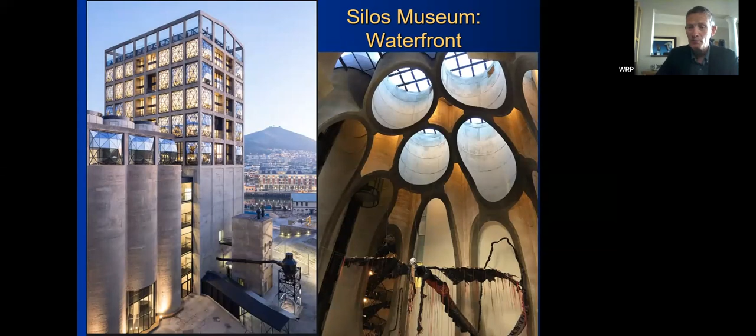Coming back to South Africa, you know what you're missing. Some of you have been here before. It's got lovely coastlines, and Cape Town in particular is a very nice part of the world, one of my favorite spots. Some lovely scenery here, this is Camps Bay, right next door to the conference centre. You've got big shopping centres you would have been able to visit. There's also a new museum right next to the conference centre called the Silos Museum. As you can see, it's an old silo built hundreds of years ago that's been converted into a large, impressive museum and hotel complex.

Inside, they've cut the silos out, and they've put in lots of exhibits, etc., that you would be able to visit. This museum is apparently one of the top 10 in the world. It's been rated for its architecture, etc.

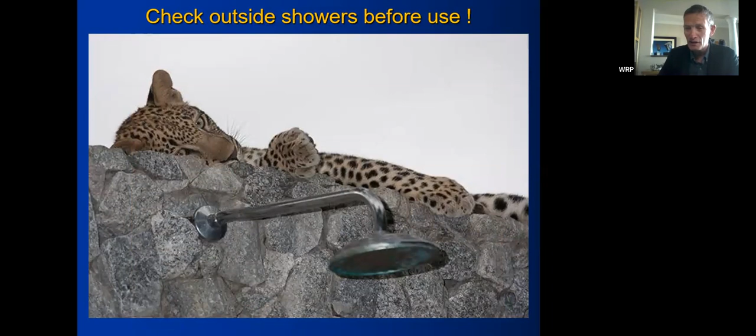Outdoor showers are quite common in most of the game parks, so you just have to be careful. If you have a shower, just watch before you go into the shower who's there. Elephants - always close your windows. Don't tease the elephants, they don't like being teased too much, so you've got to be a bit careful with the elephants. Some of the game parks, you can hire bicycles.

They even have races through the game park. For mountain bikers, most people do their personal bests in these conditions, so you should do quite well. Just make sure you can cycle at more than 25 miles per hour, which is the top speed of the elephant. You won't be able to outrun any of the other big 5, like the lions and the buffalo and such like - they go at between 40 and 50 miles per hour. So just make sure you can go faster than your partner, then you should be safe, I would think.

The South African water supply system, I mentioned it previously - I'll recap a couple of slides. So those that were in Seattle may recognize one or two, but the talk is quite different. South Africa's got one of the most integrated and complicated water resource systems of its type in the world. We are transferring water from one part of the country to the other, often over distances of 1,000 kilometers or more, and through mountains, over mountains, round mountains, you name it.

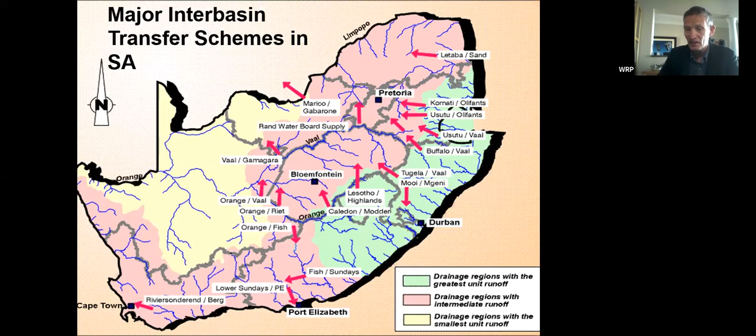This is going to happen more and more all over the world as water becomes scarce. It's already scarce - I showed this picture previously. This is the Orange River Basin, which is 1 million square kilometers. This is probably the most integrated water resource system of its type in the world.

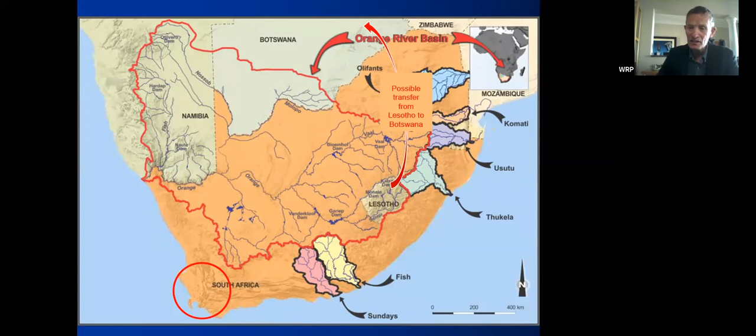We're currently looking at a new transfer from Lesotho as far up as Botswana. Botswana is looking at the potential for transferring water from the Lesotho Highlands, a mountainous region with excess water, up to Botswana, which is pretty arid, quite flat, and has got water issues. It may or may not happen - it's currently being looked at and investigated.

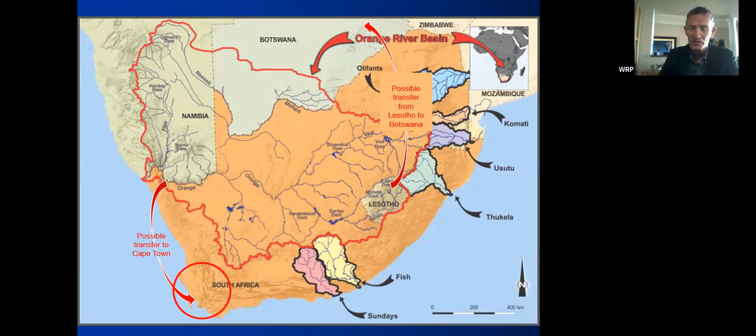The other one that people keep considering, especially after the recent Cape Town problems, is moving water from the Orange River down to Cape Town. That's about a 600 to 800 kilometer transfer that would be pooled into this huge integrated water resource system. I mentioned water resource systems in the past - just to touch on it, I'm not going to go into any level of detail.

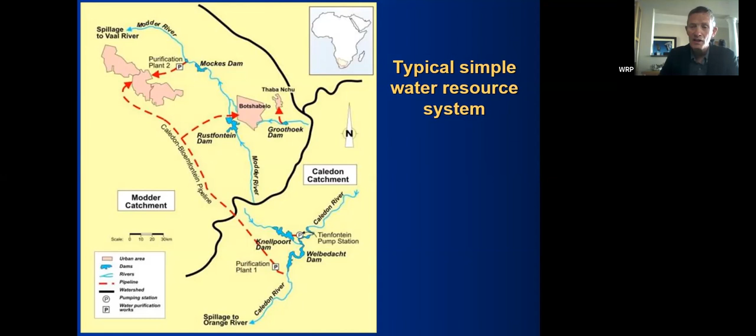Basically, we take a map of an area, which is fairly simple. We identify the resources, the dams, the channels, etc., and we identify the demand centers. We then develop a systems model, which is basically kind of complicated. We make it really complicated, adding linear programming, dynamic programming, out-of-kilter algorithms, and anything that makes it even more complicated. Then we analyze it, running it through 1,000 plausible sequences of weather patterns, and we get lots of potential results.

We use these models to operate very complicated and integrated water resource systems, supplying different demand centers at different levels of reliability. That is a key element of a major water resource planning analysis. Not every demand center gets supplied at the same level of assurance.

Farmers, for instance, would be supplied at a 1 in 20 year risk of failure. A city would be supplied perhaps a 1 in 100 year risk of failure. A power station at perhaps a 1 in 200 year risk of failure. We don't go above 1 in 200 years - it becomes a bit academic after that.

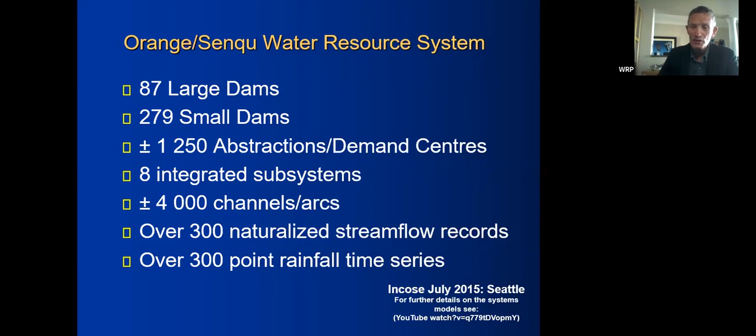That system is made up of 87 major dams, almost 300 smaller dams, 1,250 demand centers or abstraction points, 4,000 connections like bits of river, canals, pumps, that type of thing, and 300 naturalized inflows. Again, I'm not going to go into the detail of this - it's all documented somewhere on the internet, so you can find out more if you're so inclined.

What's important, and we've mentioned this a couple of times, is that the larger the system, as you develop very large systems, like a 1,000,000 square kilometer system, it increases the critical periods, and you end up with a 15-year critical period instead of a 3 or 4-year critical period. Natural droughts in South Africa tend to occur every 10 to 15 years, naturally.

This slide here is a bar chart showing the storage in the reservoirs for the whole country of South Africa. The top of the bar represents the total volume, and the blue part of the bar represents how full the dams were at that specific time. Where you see a lot of yellow, that represents storage that is not full - it's not got water in it, representing a drought event within this 100-year record.

Over the 100 years, you can see there's about 6 or 7 drought events, and these are naturally occurring events. It's often very easy to blame climate change on everything, but you need to bear in mind that droughts do occur naturally, and climate change may increase the frequency of the droughts, or it may make them worse than they would otherwise have been. But with or without climate change, you will still get droughts and you will still get floods.

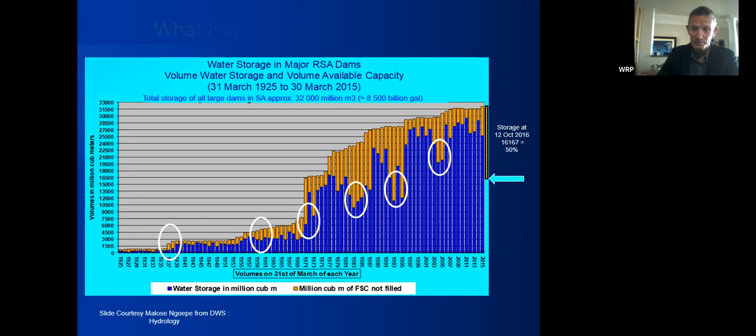Now, Cape Town - what happened in Cape Town? You've probably seen it on the news since 2015. There was quite a lot happening in Cape Town; it was a daily thing on the news.

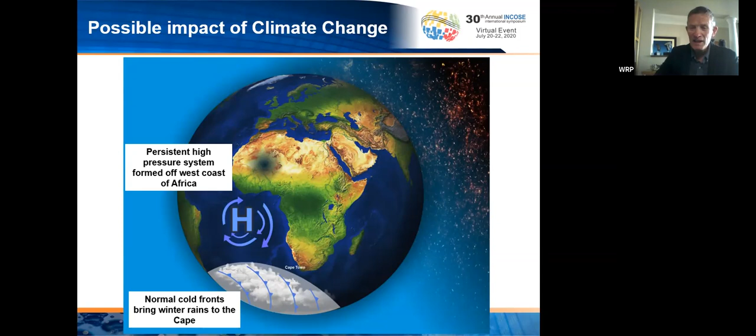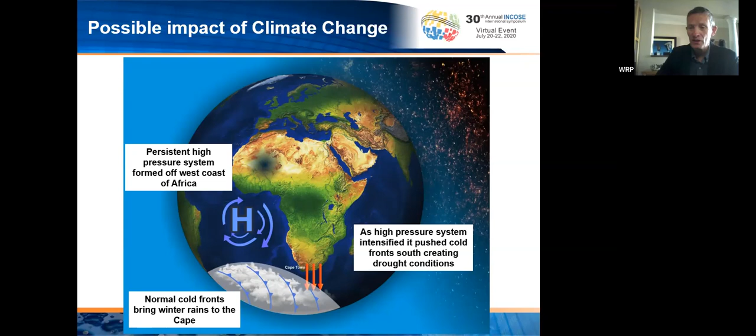Cape Town, being at the bottom of the African continent, tends to receive winter rainfall due to cold weather fronts coming through - it's a climate system model that they've got. So the cold weather brings rain to the Cape. What happened over a period of 3 or 4 years was that we had some high pressure systems that would come in and sit in the ocean just to the west of Africa. These are normal events, but we seem to have had more than the normal amount over that 4-year period, with the result that it pushed the cold fronts to the south and they missed the Cape. So Cape Town ended up having a 4-year drought, which was the worst in living memory.

Now, Cape Town is a city of about 4 million people. It's an urban industrial area - 70% of the demand is urban industrial and about 30% is agricultural.

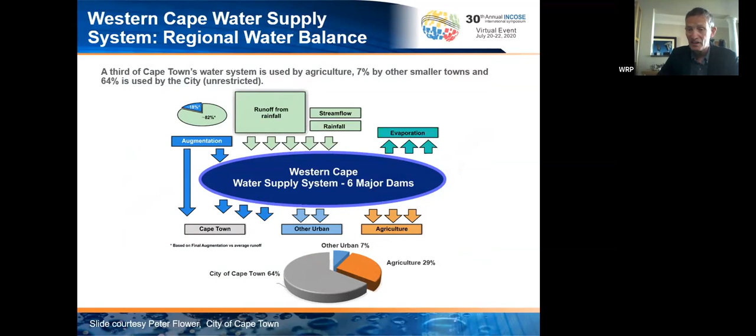It has 6 major reservoirs. I think in the previous presentation I talked about the Orange River system. We use the same techniques and modeling to analyze the Cape Town system, and there are engineers in Cape Town that are doing that. I'm not involved personally in it, but I do work with the city of Cape Town on occasion.

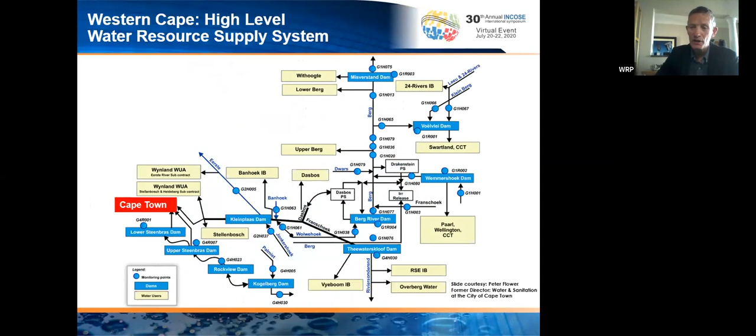This is just a schematic, a high-level schematic, showing you the water supply system. Again, it is horrendously complicated if you drill down into the lower layers, as we did in the previous Orange River system. A couple of pictures of the dams. You can see a few of the dams here in Cape Town. They've got 6 major dams that supply the city that are all linked together, and they operate the system.

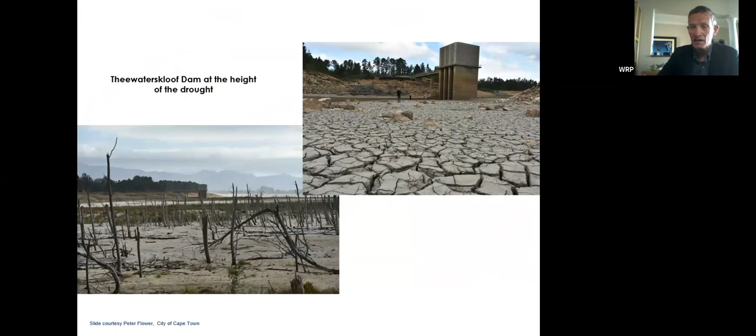This is what it looked like in their Day Zero, when they were running out of water, and Cape Town was reputedly going to be the first major city in the world to completely run out of water. That was false and fake news, but it was Sky News and a few of the other big news channels ran it every day, which didn't do the tourist industry a lot of good.

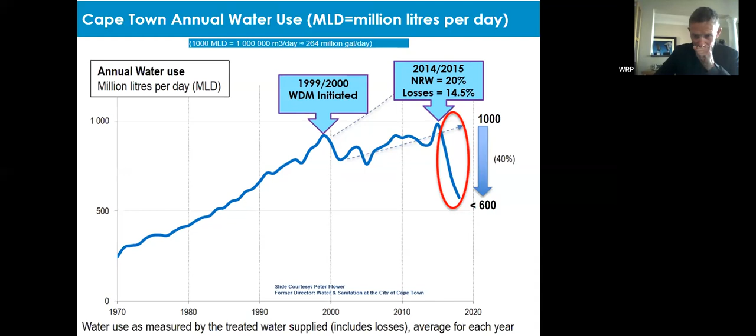So that's the demand management. Their losses were about 14.5%, which happened to be about the lowest in South Africa. Most of the cities in South Africa have water losses between 30 and 40%. So 14.5 was a very good number.

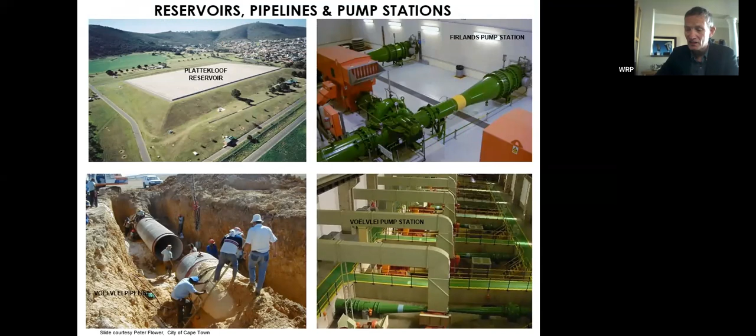A couple of pictures showing you the infrastructure in Cape Town, some of their pipelines, pump stations, etc. Water treatment works, they've got 5 or 6 big water treatment works.

Now, what was quite interesting, we organised a water loss conference in Cape Town for the International Water Association back in 2018. And we managed to time it such that we were within a month of Cape Town running out of water completely in the worst drought that they've had in 500 years. Whether that was a good thing or a bad thing, I'm not really sure, but it turned out to be quite interesting.

We got lots of hate email from all over the world, people sending me threatening letters about hosting a conference in a city that's got no water and how dare I do that and such like. And other people were less aggressive, but they wanted to help. People from Alaska and New Zealand wanted to ship water to Cape Town. It was very kind of them. I mean, they were being nice, they were trying to help.

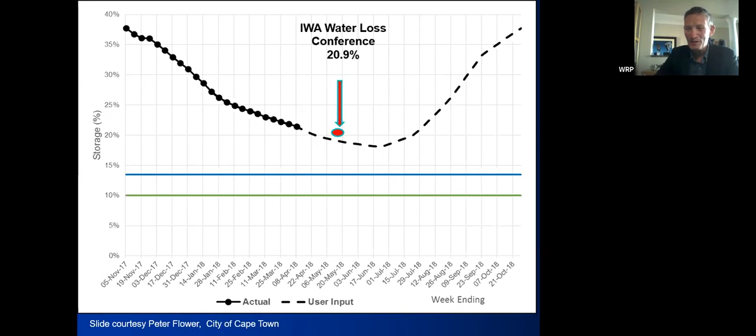Interesting, you can't really get much further away from Cape Town than Alaska and New Zealand. So when my colleague Peter Flower got these invitations to have water sent to them from those countries, he was quite taken by that. Cape Town, in fact, despite all the negative publicity about how bad things were and how they didn't manage this water loss thing properly,

they won quite a number of awards for their water demand management expertise and what they did in Cape Town. And they won the COP21 C40 Cities Award in Paris, which is quite a prestigious event. Not as prestigious as the IWA Award, which we gave them for being the first city in the world to reduce its demand by around 50% without going on to intermittent supply.

It's very easy to cut your water demand down if you just chop it down and cut areas off. But to do it without going on to intermittent supply, that takes a lot of expertise, and they deserved all the awards that they got.

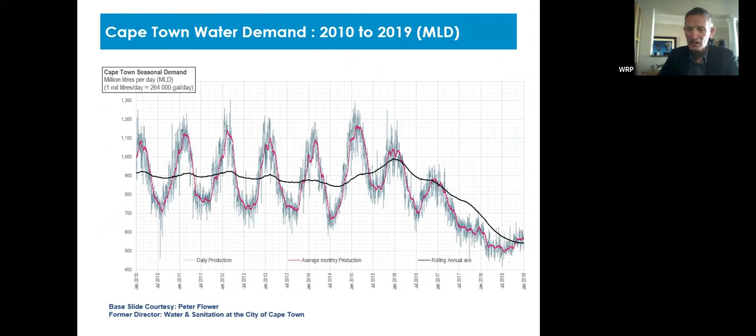This is a slide showing you the 10 years of demand, where the city of Cape Town, their demand drops. And you can see at the end, the last 3 years, it dropped down dramatically. I just want to point out, and you can go on the internet and check out if I'm telling you the truth here or not. In 2015, I made a quote in Seattle, and this was before the drought in Cape Town started. I said we were overdue the next drought and that it's on its way.

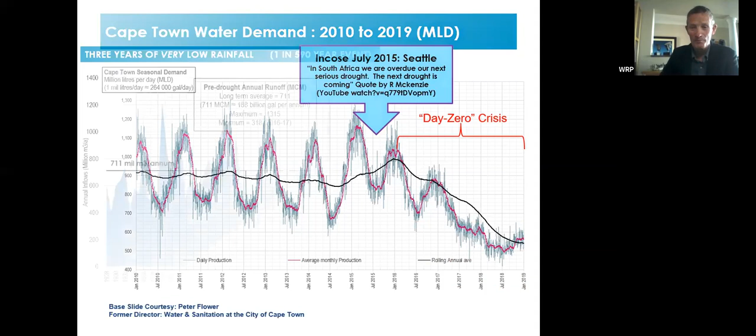Well, it came the following year, and it was a 1 in 500 year drought, believe it or not. So it was quite significant. This slide shows the annual inflow to the 6 dams in Cape Town, spread back over 100 years. You can see the last 3 years were well below average, and getting the 3 worst years back to back was something no one could have anticipated.

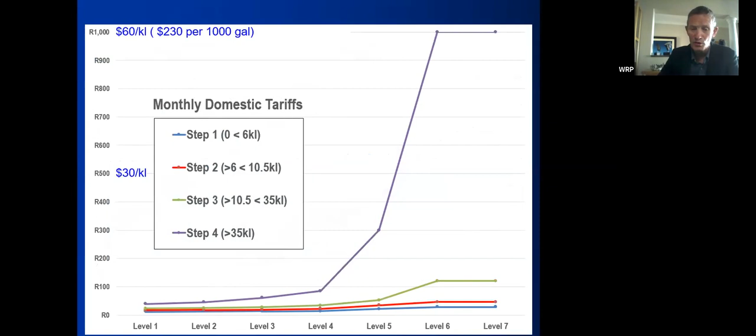They managed it by increasing the price of water, pushing it up to $60 a kiloliter for the top tariff if you use more than 35 kiloliters a month. They then got the penguins in to help people save water: shower for 2 minutes, report leaks, do water-wise gardening, shower with a buddy, shower in a bucket. They all did their bit, and the penguins helped save Cape Town, which managed to get through the worst drought in the last 500 years.

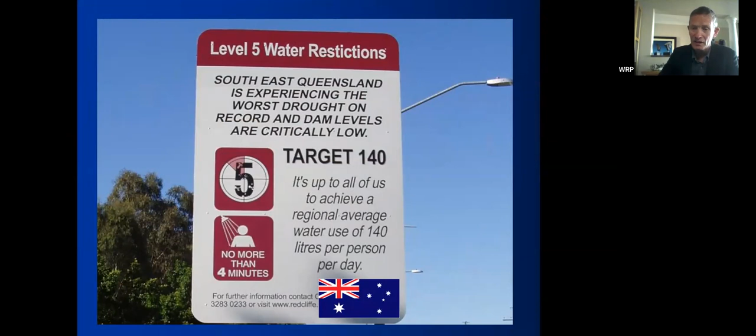Interestingly, compared to the Australian drought, the worst in Australia in hundreds of years, which had a target of 140 litres per head per day, Cape Town got down to 120. That's quite significant, so Cape Town was amongst the best in the world when it came to saving water.

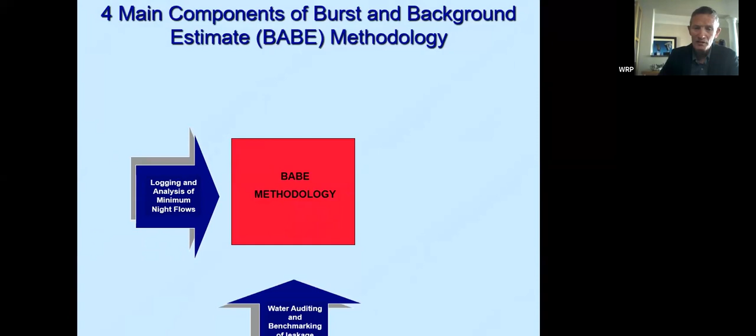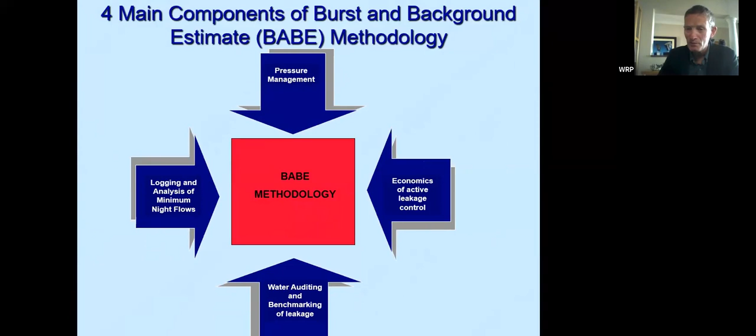In South Africa, now that we've talked about water resources and the systems, we look more at the leakage side. We introduced what they call the BABE methodology, burst and background estimate methodology, made up of 4 components. I'm going to skip through them fairly quickly, they're all available on the internet, and the software that goes with them is available freely from the Water Research Commission.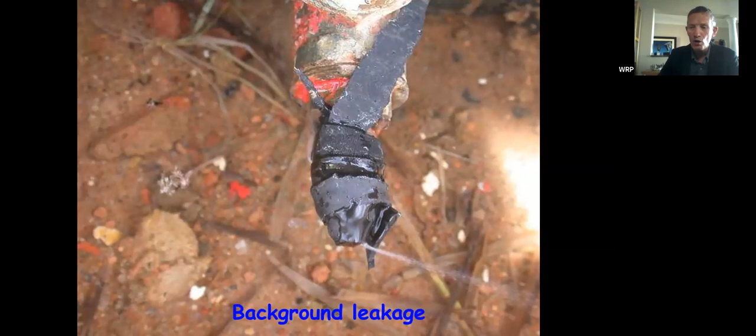It's based on the UK water industry approach of dealing with leakage in 2 forms: background leakage, which is all the small leaks you can't do anything about, and burst leakage, which is all the big leaks. So it's big leaks and small leaks, it's not rocket science. We've got 4 models.

This is a slide that I normally use, and I get into trouble using it quite a lot. So I've added Stuart Hamilton there from the IWA Water Loss Group, he's the new chairman, and I've passed this over to Stuart. He insisted that the slide wasn't representative, so we've modified it.

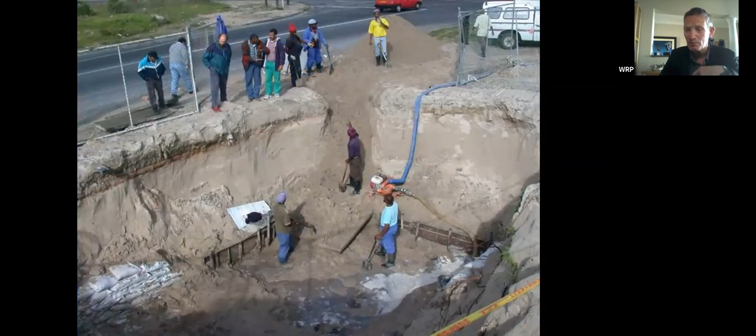We've got 4 models: Sanflow, Bench Leak, Presmac, and Econoleak, and these models are available on the internet. Bench Leak is basically a water auditing model where you use a water balance, a standardized water balance that has been accepted around the world, including America, Australia, Europe, Africa, all over the place. That's quite important - we talked of leakage performance indicators previously, and that's part of the water auditing and benchmarking.

I introduced an indicator last time, the ratio of spectators to workers, which is actually quite a useful indicator in South Africa, I have to say. But we've got a new one - I'd like to introduce you to a new one from a friend of mine, Prof. Mike Muller. He's actually an engineer with a sort of political hat as well, and he came up with this indicator called the Mike Muller Mercedes Index.

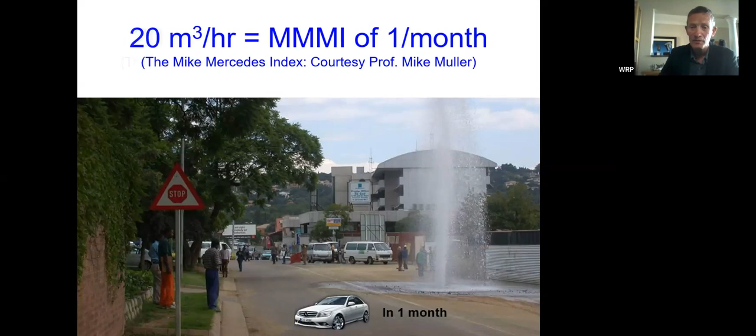It shows you that a leak is the equivalent of 1 Mercedes-Benz per month. It obviously depends on the cost of the water and the cost of the Mercedes - we're using a mid-range C-class in this case. And that leak is equivalent to 12 Mercedes-Benzes per annum. This is quite useful for the politicians, because trying to get over the value of leakage to them is sometimes a problem, but not if you tell them how many Mercedes-Benz cars it's worth.

So this is from a good friend of mine, Prof. Muller, and this is his index. I've borrowed a couple of slides there.

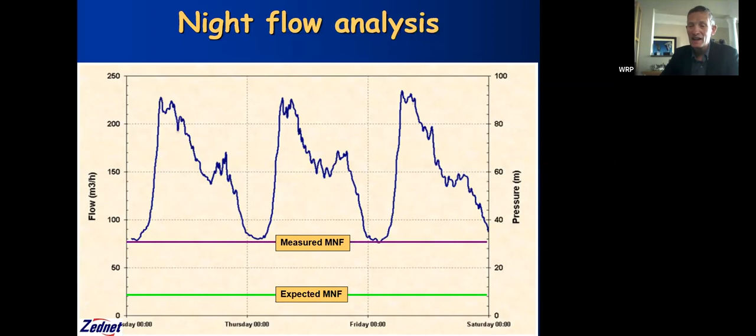There's another model, the second model, the night flow analysis model, which looks at the water going into an area at night time. You use this to tell you whether you've got a leakage problem or not. So you monitor the water, you measure the minimum night flow, then make an estimate of what it should be, and the difference gives you an indication of how much leakage you've got.

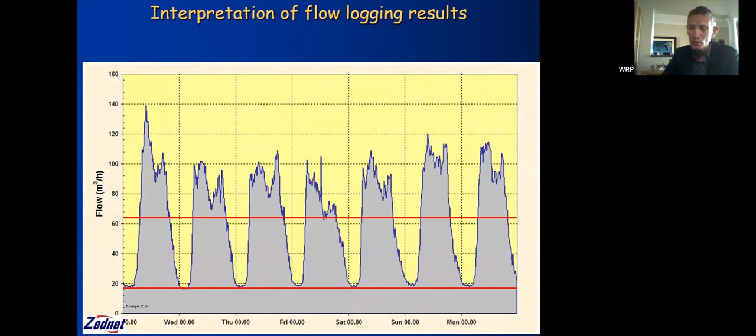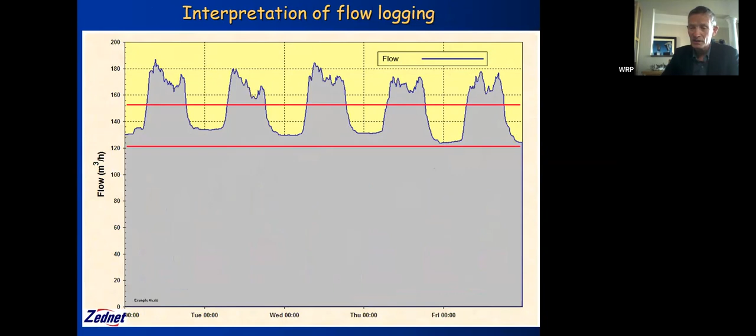It's quite useful. This is a logging result for a 6 or 7 day period - you can see it's not too bad, the night flow is not too high. And this is another example - these are real examples of real areas that we're supplying water to. This one has about 90% leakage, and this is not unusual, particularly in developing countries. The third model is a pressure management model.

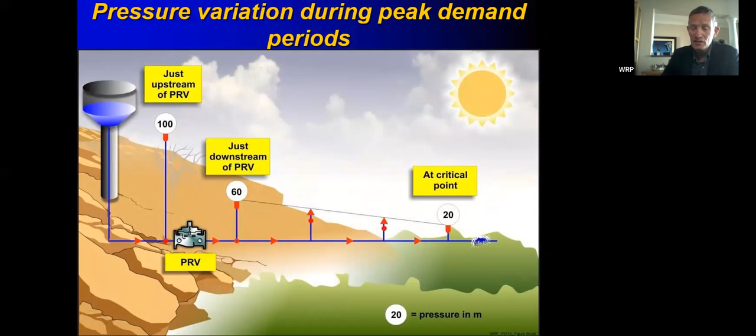Pressure management is your low-hanging fruit, something we promote very heavily in South Africa, and something I have a particular interest in. It basically involves looking at the system. Systems are designed to give you a certain pressure during the critical peak demand period at your critical point. During off-peak periods, the pressure builds up and you end up with leakage, particularly at night time. That's why most leaks develop at night, because your pressure builds up in the system.

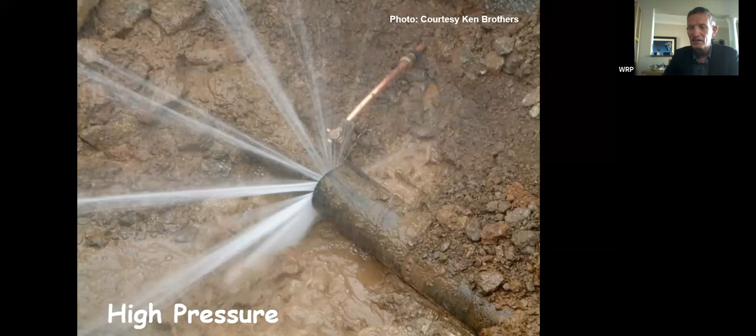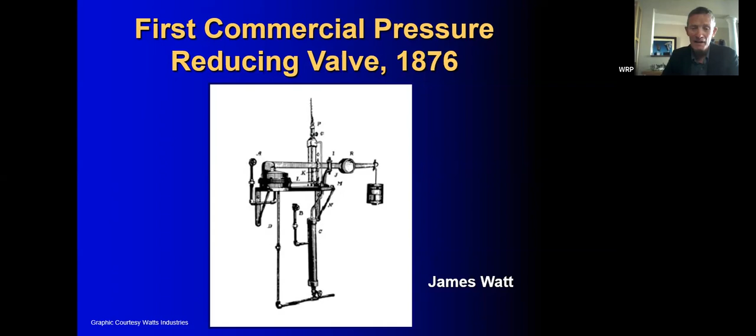So we introduced pressure reducing valves. I need to mention they were invented by a Scotsman, James Watt, who also helped kickstart the Industrial Revolution, so it must be good equipment. They don't quite look like that anymore, they look more like this. You get some big PRVs, made all over the world - good quality ones from America, Canada, Israel, Europe, Australia. Scottish, of course, will be amongst the best, I would imagine.

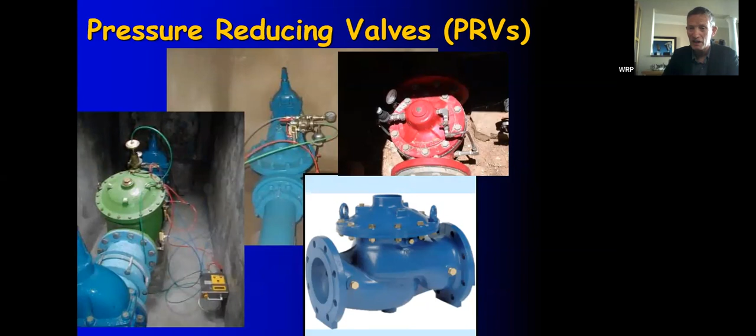They come in all sizes and colors, but we can also apply controllers to them that will give us extra control during the off-peak periods.

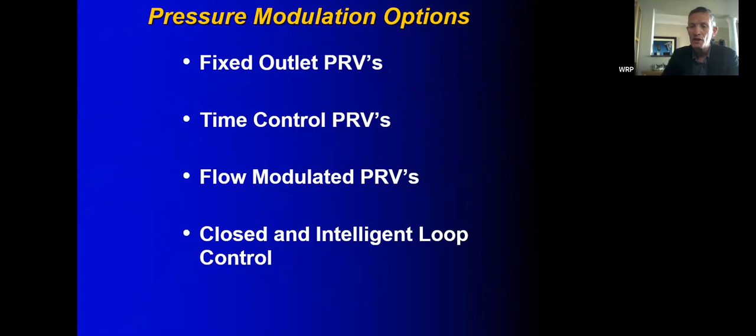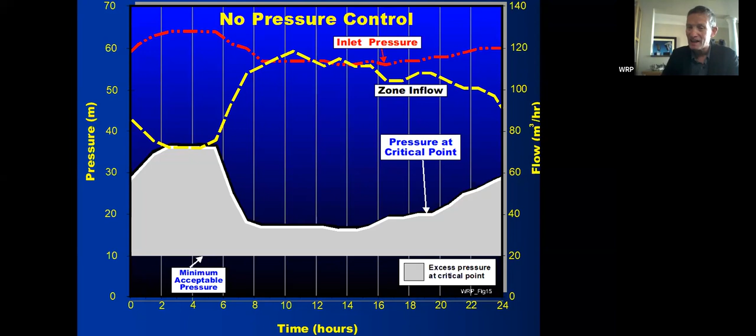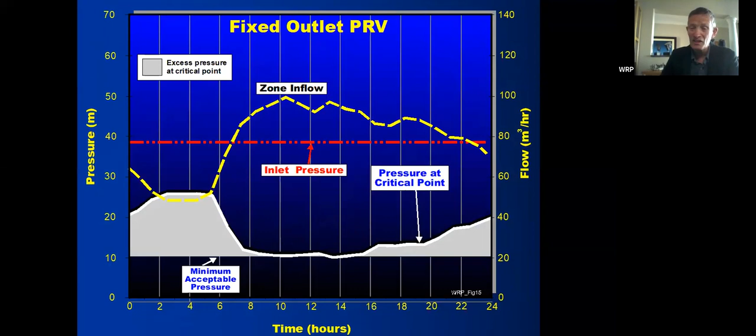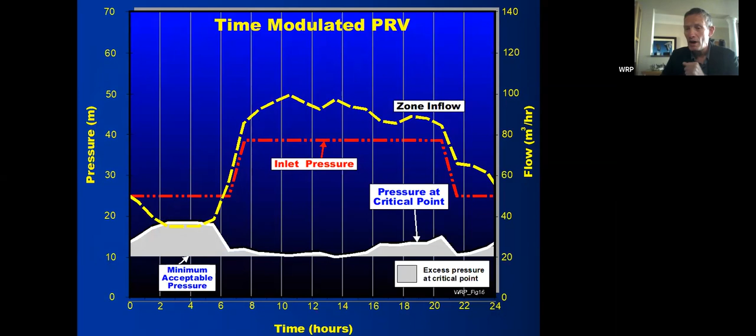This slide basically shows you a 24-hour profile at the critical point. The grey area shaded in is excess pressure at the critical point, indicating that you can cut down on leakage if you reduce that grey area. So we can put in a pressure reducing valve, and that will take something off the grey area - you can see just using a normal pressure reducing valve gives you your biggest saving to some extent. But we can then add an electronic controller that will take the pressure down at off-peak periods, night time and maybe sometimes during the day. That takes even more of the grey area out of the picture, so you've now saved additional pressure. Whatever you can save on the pressure reduces the leakage.

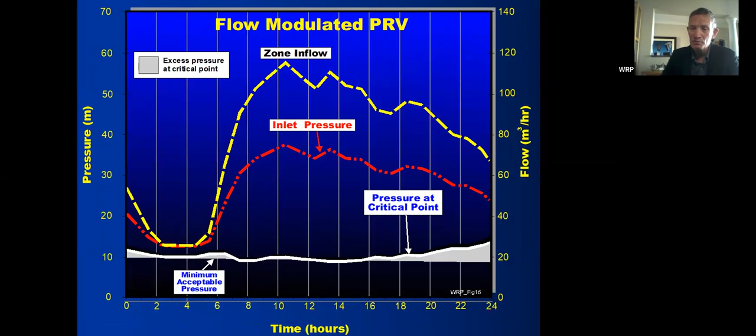And we can go to a higher flow modulating controller - that gives you probably the best that you're going to get. Or you can use closed loop control, or intelligent loop control. There's a whole bunch of new controllers that have come out.

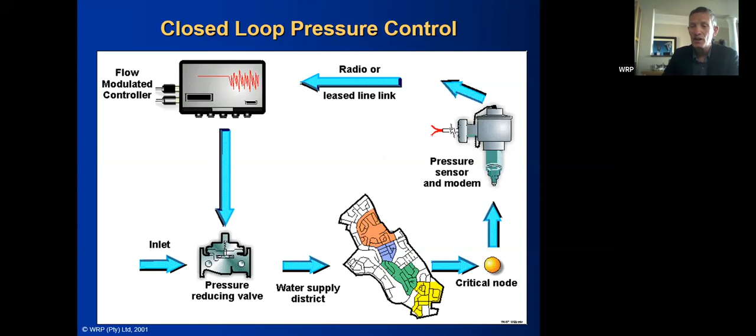Everyone has advantages, and for every advantage there's a disadvantage. Maintenance is often a big issue, as is the reliability of the components. Sometimes you're better just using a standard pressure reducing valve with no controller; other times you should use the most expensive, fanciest controller. There's a couple of valves there using hydraulic control - they're also quite popular these days.

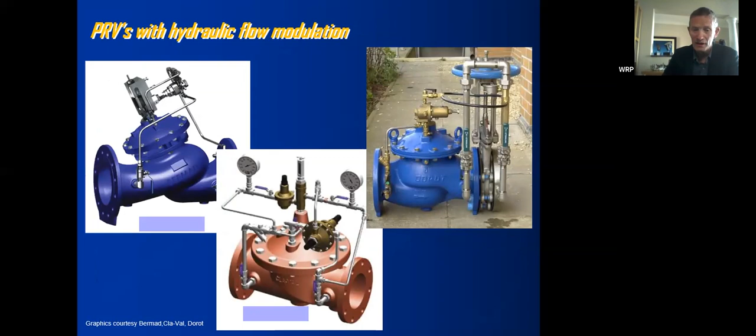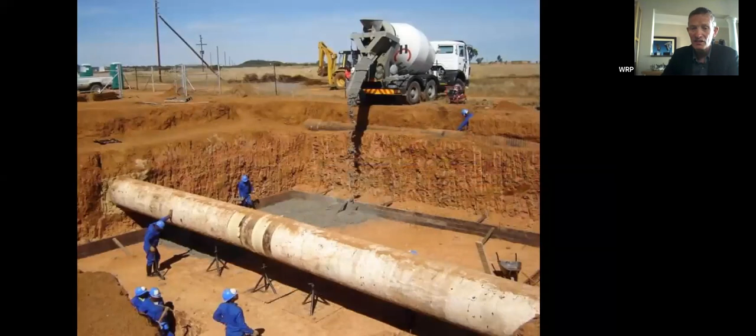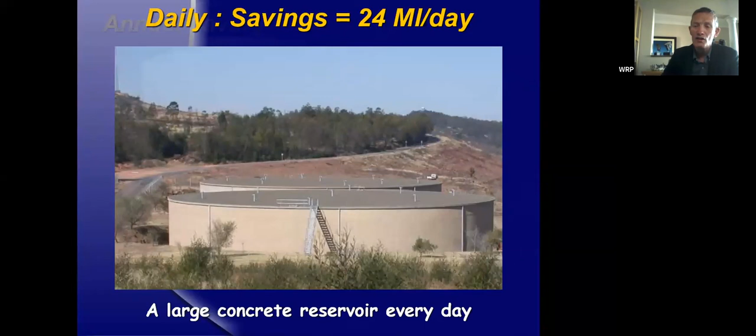Some of the big installations around the world we've worked on - Khayelitsha is a big installation, we saved about 9 million cubes per annum, that's a swimming pool every 2 hours. Sebokeng is another big installation, in Johannesburg, similar idea, similar savings. Both of these installations had a payback of about 6 weeks on the cost of the actual installation. It's difficult to say exactly how much the savings were because exchange rates keep changing, but the numbers were big - they're certainly big.

The fourth model available through the Water Research Commission is the EconoLeak model. I don't really like this one, it's a bit complicated, but I'll take you through a couple of things.

We look at how much water you lose in a leak, and the key take-home point is don't look at the size of the leak, because that's not always telling you how much water you lose. This leak lost 20 cubes in 3 hours. This leak lost 40 cubes an hour for 6 hours, so 240 in total. This is a huge leak - it lost 600 cubic meters of water. Then we've got a small leak - you wouldn't think it would lose so much - it lost 2,200 because it ran for 3 months. And another, even smaller one, ran for 3 years and lost 13,000. So don't ignore the small leaks.

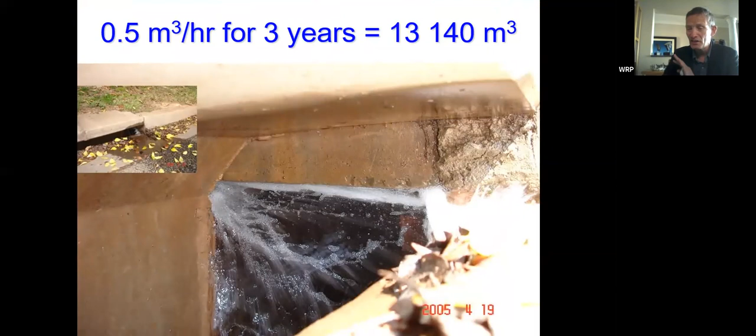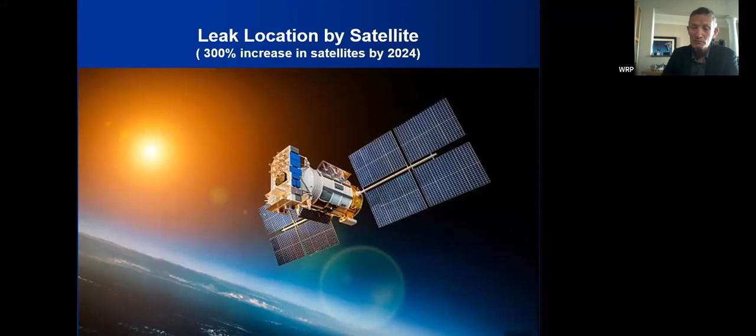It's important that you actually sort out the leakage. High tech, looking for leaks - Elon Musk, a South African who I think you were trying to get to come and talk at your conference, was too busy building a rocket, I believe. But anyway, he's thrown up some satellites, or planning to throw up another 300 or 400, and they say they can find leaks from a satellite. I'm yet to be convinced on that. In the UK, they've got a dog that can sniff out leaks.

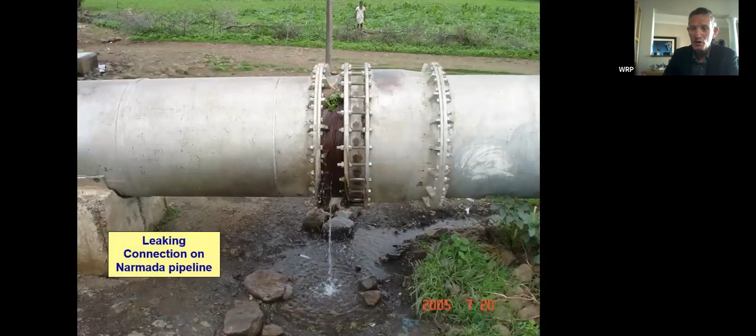We don't actually need dogs to find leaks in South Africa. We can find them ourselves. They're normally quite obvious - you don't even need a satellite to find this one. So often, going the high-tech route on leak detection is not always necessary, I have to say.

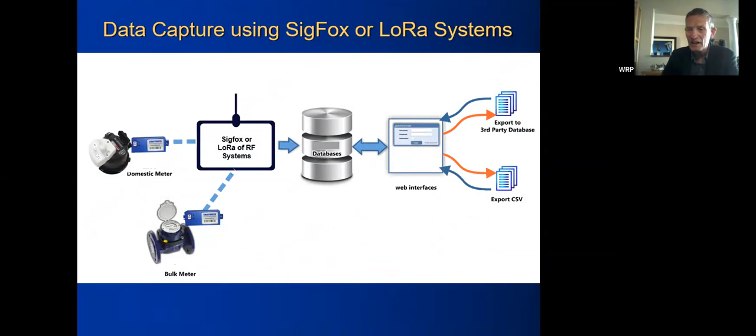Using data acquisition systems, there's lots of new technology - GPRS on the GSM network, Sigfox, LoRa, RF systems - pulling in information, monitoring the water going into an industrial complex or an office development or any system you've got. It's actually very valuable. It shows you what's happening.

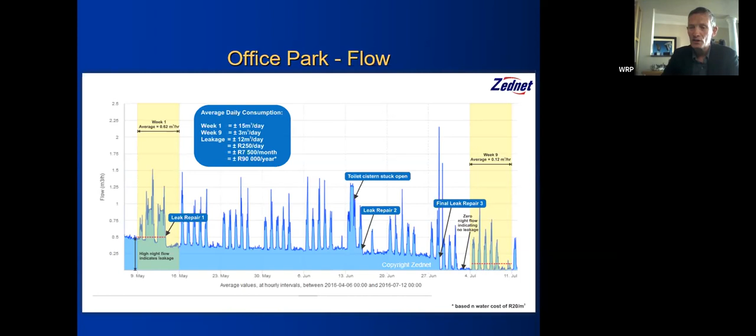This shows you an office complex over 8 weeks. You can see the baseline, there's a high leakage there, and eventually we managed to eliminate it. If we hadn't used real-time data acquisition, we wouldn't have known about that and wouldn't have been able to find it. This is what it should look like on a normal month.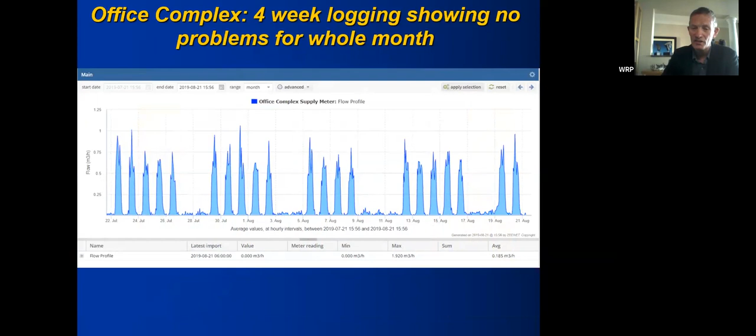You can see 5 peaks every week. There's one there with only 4 - that's because there was a holiday on the Friday. So you can see exactly what's going on. You've got your water use at the weekend, nothing's happening.

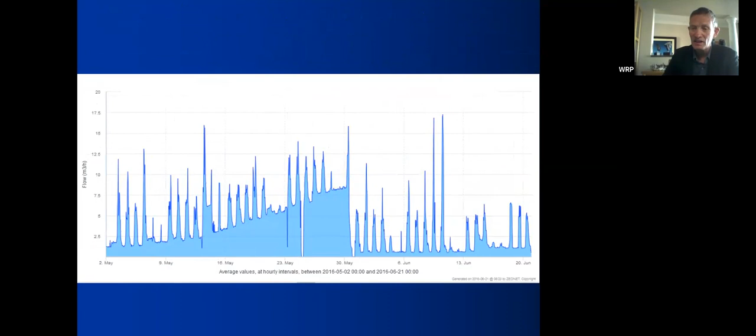This is an example of a leak that was running at a constant rate, and then we fixed it. This leak was 99.5% of the water demand. I mean, it's crazy, and it ran for 3 years.

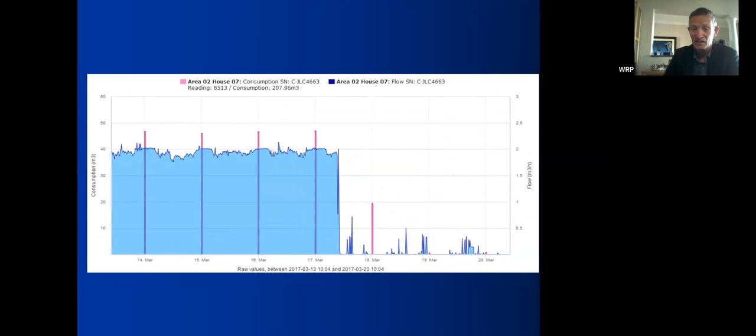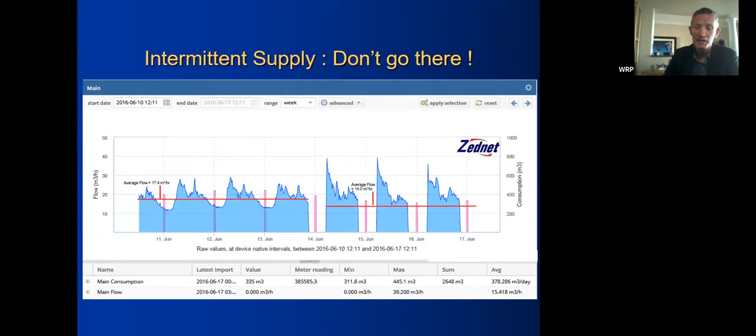This is another one - this is a prison. You can see this one. They moved on to intermittent supply, which isn't a good idea. It causes air to get into the system and gets messed up. You end up with all sorts of problems, and you can see you get spikes when you refill.

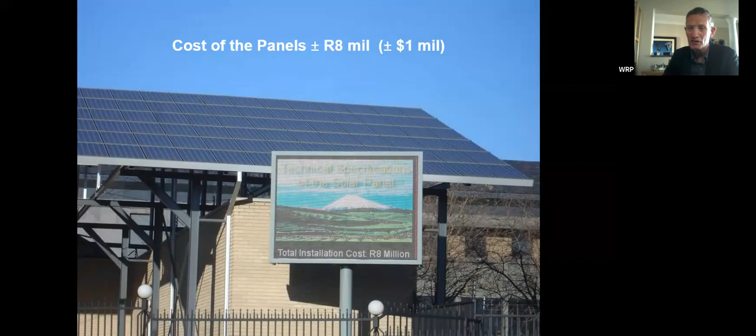We also look at energy, carbon dioxide and energy. We've got some solar panels next to our office. They built these solar panels for about R8 million in order to save energy and save on carbon dioxide - 90 tons of carbon dioxide.

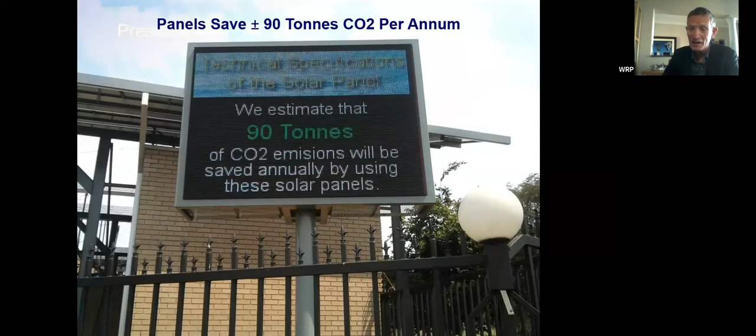Compared to our pressure management installation, our pressure management installation saved 13,000 tons of carbon dioxide per annum just due to the reduced pumping, because all of the water in Johannesburg and Pretoria has been pumped an average of about 200 meters. So for every cubic meter you save, you can calculate the energy savings and thus the carbon dioxide savings. So in this particular case, the solar panels were not that cost effective - in fact, they didn't have a payback.

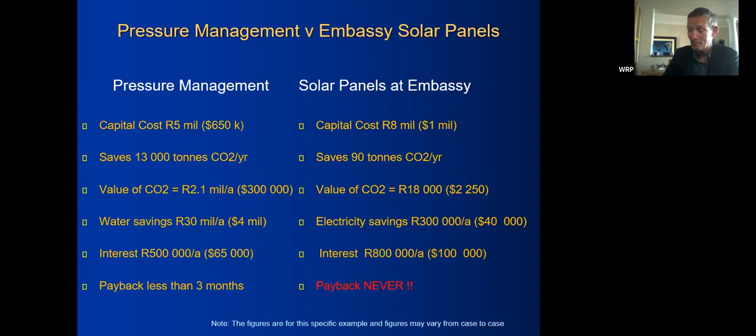Now, we're getting to the end now. You'll be happy to hear.

I was in Australia a couple of years ago, and I was chatting to a friend, Peter Rochlin, who's a sort of water resource planner, and he shared with me what they're doing or what they're looking at doing. I don't know if they've actually done it or not, but they're looking at doing some big transfers in Australia. I thought I would share this with you because I believe it's quite interesting.

I think it's quite applicable in many parts of the world, particularly where you've got lots of sunshine and can use solar power to generate electricity. It probably wouldn't work too well in Scotland, but certainly Australia, South Africa, Namibia, Lesotho, probably many parts of America, this could work. They wanted to move water from a dam in the north of Australia down into the Murray-Darling Basin, which supplies Sydney. I think there's also links through to Melbourne and probably water through to Adelaide. Anyway, it's quite an adventurous scheme involving 2,500 kilometers of very large canals - not tiny canals, big lined canals.

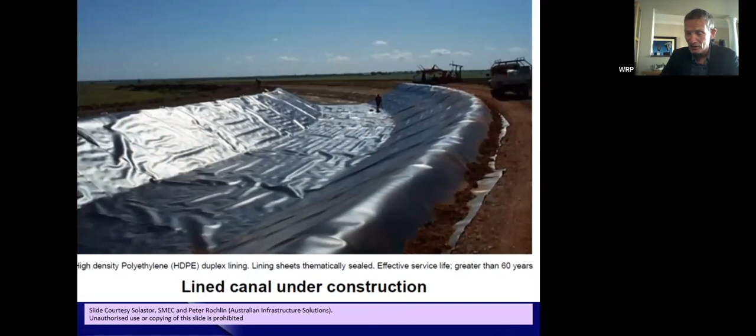The key thing I really liked about this scheme is that solar panels are quite common—we've been using them for years—but what I found interesting was they plan to use graphite batteries to store the heat generated from the solar panels. So the solar panels generate electricity, and the electricity generates heat, which gets stored in these big blocks of graphite.

The graphite can store that heat—I think, if I'm not mistaken, up to about 800 degrees centigrade, which is pretty serious as far as heat goes. It's insulated by xenon gas, I believe. I don't know the technology, but I'm sure it's on the internet somewhere. Everything's on the internet. But the key point is that the batteries can keep the heat for about 4 weeks.

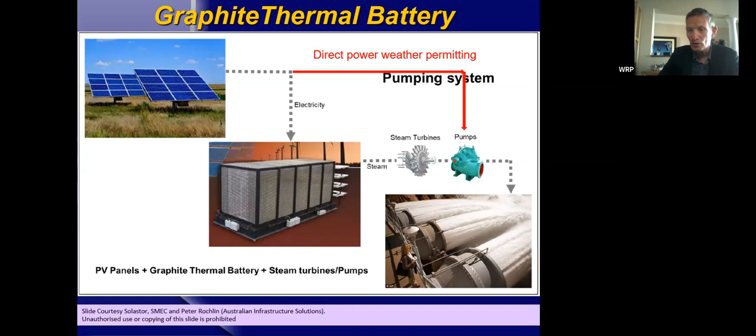And that is a game changer when it comes to storing solar power, as far as I'm concerned. This is quite an interesting project or technology that I really found could be a game changer, particularly when it comes to water transfer schemes, because most water transfer schemes tend to be over dry areas—you're moving water over deserts and long flat areas, and you need to pump it up every so often.

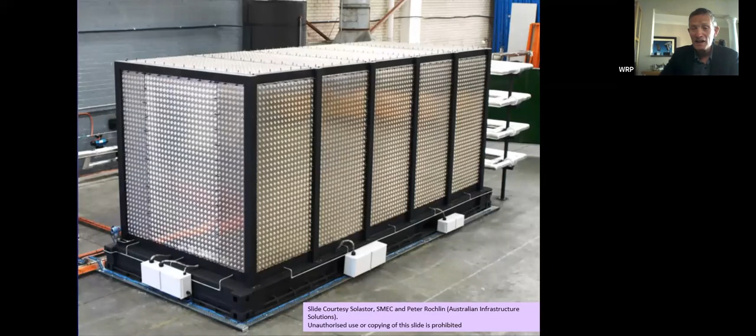And you can't get electricity there because it's in the middle of nowhere. So you can generate your own electricity here. This is a particularly nice option, I think, if it works. I don't know how advanced it is—you'd need to check with the Australians—but it's a very new technology as far as I'm concerned.

The graphite batteries are about 23 tons apiece, and you can put in 100 of them, or 1,000—as many as you want to match whatever solar panels you put in. It has disadvantages in that the efficiency isn't that high, about 40%, because you've got a double conversion: you're going from electricity to heat, then from heat to steam, and then from steam back to electricity. So there's a double whammy on the efficiency side, but it doesn't really matter because you've got unlimited sunshine in most of these areas.

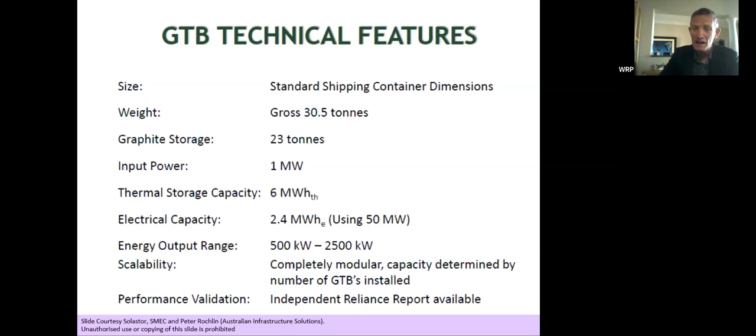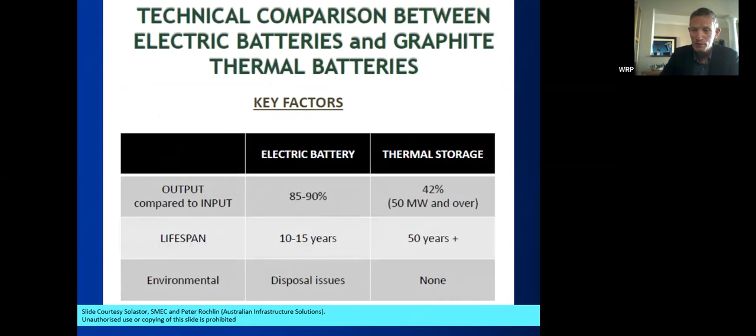So I think this is quite a nice one. The other thing about the batteries is they're environmentally stable—they don't really damage the environment at all. You can heat them up and cool them down as many times as you want. This is a very interesting technology, and I hope to hear more about it in the future. On that point, I've already been run out by the bell, so I'd like to finish there. Thanks for your attention—I hope you found it interesting, if nothing else.